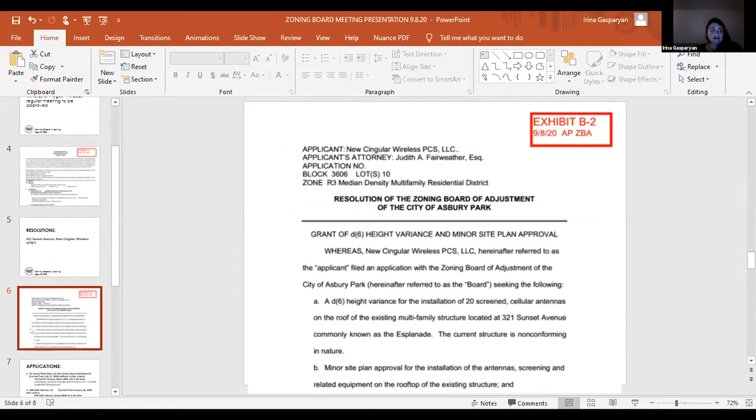Okay, all right, and I'm sorry, just a matter of record keeping. So we're going to strike that as Exhibit B2 for this evening. It's been tabled, that's all. It hasn't been entered, so you could just table it. Okay, all right, thank you.

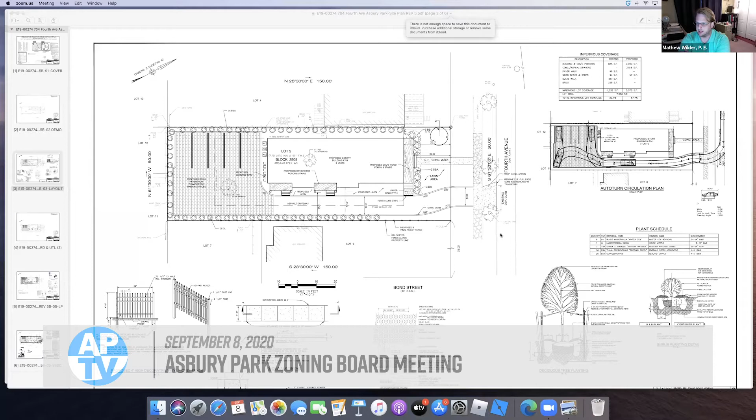Everybody see the site plan up right now? Yes. Yes. Okay, has that been marked? So this is the set of the site plans that were submitted ahead of this meeting. I'm not sure where we left off with exhibits. Irina, has that been marked? Yes, it has been pre-marked. Just one second. Okay, and that is marked Exhibit A6.

Thank you. So I think what I'll first do is a quick summary of the larger changes we made to the plan, and then I'll go through the inside engineering review from September 3rd and hit some of the finer points. So from a macro overview, the most significant change we made to the plan from a site perspective is we rotated the parking 90 degrees. There was some concern about the vehicles backing out towards the AC units, and realistically, when we shifted it, it just made a lot more sense from a layout perspective to have the parking going east to west versus north to south.

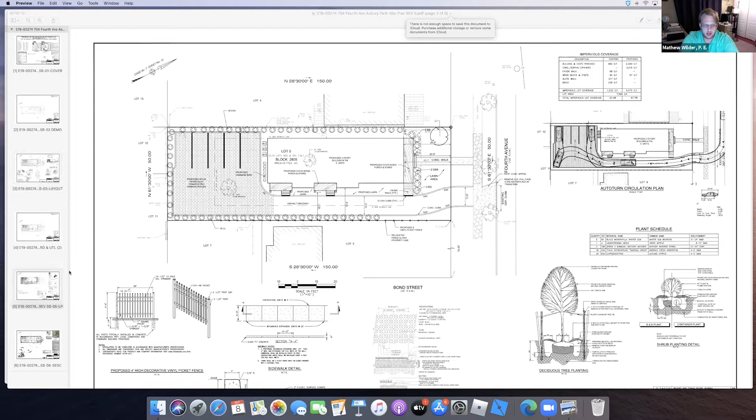The next sheet I'm going to flip to is my lighting. Whoops, what just happened? I'm not sure why, let me just try that one more time. I apologize, it decided to go crazy on me for a second. Let's try that again.

All right, so the lighting plan we did revise. We're going to make some additional modifications to it, but what we tried to demonstrate here is the impact the proposed fencing has on the lighting design. What we typically do is mask the areas off-site where our lighting has no effect, but at the request of the board engineer, we will add the illumination levels when they're zero off-site, just to demonstrate that we're not negatively impacting any adjacent property owners.

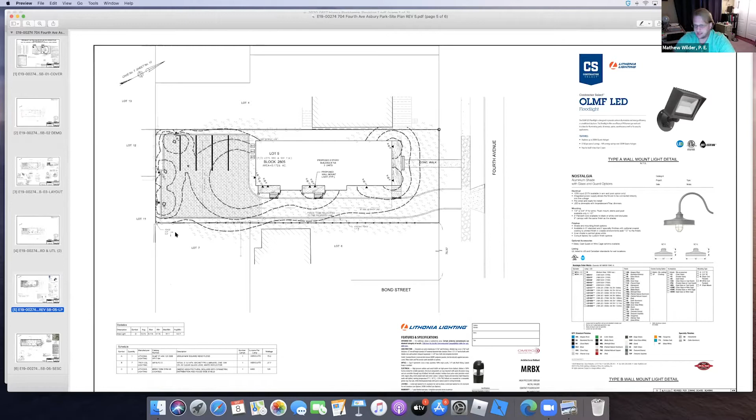And then the last thing I'd like to point out from a global perspective is the truck circulation, the vehicle circulation that we prepared for the property. Again, when we started revising that parking and rotating it 90 degrees, it actually ended up working out quite a bit better for getting vehicles into and out of the parking spaces. What we've indicated here are the two most restrictive turning movements. First is a turning movement entering the parking space nearest the building.

And that is the tightest due to the fact that you have this curve that you have to contend with to get into the parking spot. And then the vehicular movement that we modeled for vehicles leaving, we modeled the southernmost parking space as that has the most limited room to back up and then pull forward to leave the site.

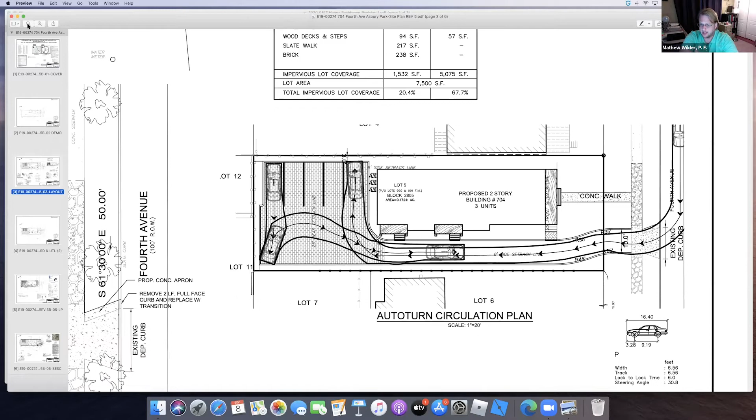So from a site perspective, Dan Conditor, the architect, will address some of the building related items reflected on my plan. But from a site engineering perspective, those are the significant changes we made relative to the revised plan. Before you get much further, I just want to go over a couple of things for the board's edification.

First, as it pertains to the driveway materials, can you describe what we have currently and how the space sizes were related to the building changing? Sure. When the building reduced in size slightly, it afforded us a bit more room for the parking area. If you recall, we were proposing 8-foot wide parking spaces by 19 feet long. Now we are proposing for the 4 southern parking spaces, 8.5 by 19, so fully conforming stalls. The northernmost stall, because it has the tightest turning radius, is actually a 10.5-foot wide by 19 space. So before we were requesting relief for parking space size, that relief is no longer being sought.

Relative to wheel stops, are they being planned? No. Right now there's full height curbs surrounding the entire parking area, which is usually enough to stop a vehicle. In this situation I wouldn't have concerns about adding wheel stops. I typically don't like them because of a tripping hazard, but realistically if we put them up against the curb line, I wouldn't be concerned with the tripping hazard. But we do have full height curb, which, for lack of a better term, the curb stop would essentially protect some of the landscaping, but the curb and landscaping sort of do that on their own.

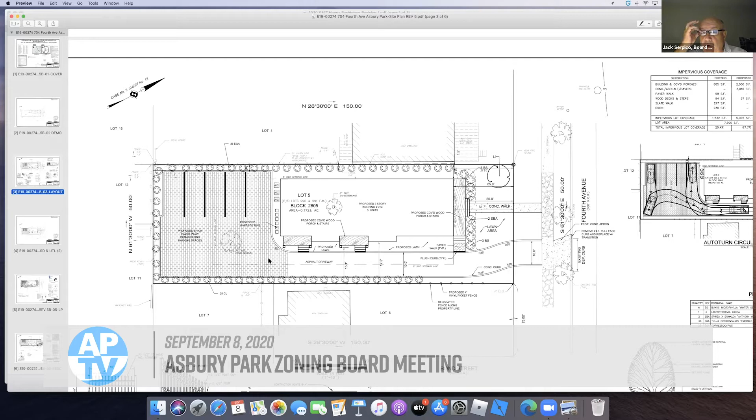Excuse me for interrupting. Which report are you referring to on the zoning review? I'm referring to comment number 17, the top of page 4. And what's the date? September 3rd, 2020. It's still the inside engineering letter, Jack. Oh, okay, okay, yes, I thought he was going to the planner's report. No, I'm going all the way through the insight letter. And just for the record, that revised insight engineering report has been marked into evidence as B3. Okay, I'm sorry for the interruption. What page were you referring to again? The top of page 4, zoning review, comment number 17.

Thank you. So the question was how we came to the 0.476 floor area ratio. Two things were done, and the architect will speak in more detail about this, but the main thing is we reduced the height of the basement. A basement with 7 feet of head height or greater is counted in the floor area ratio; less than 7 feet is not. So we reduced the height of the basement, and it is no longer considered in the floor area ratio. Besides that, the building was tweaked and massaged a little bit and I believe decreased slightly, but that is the reason we are now proposing the 0.476 floor area ratio.

Lastly, I'll quickly hit comment number 19. I realize my plan did not provide dimensions for rear yard setbacks. The required rear yard setback for this zone is 25 feet. 77 feet exists and 53 feet is proposed — fully conforming, but I thought it important to put it on the record.

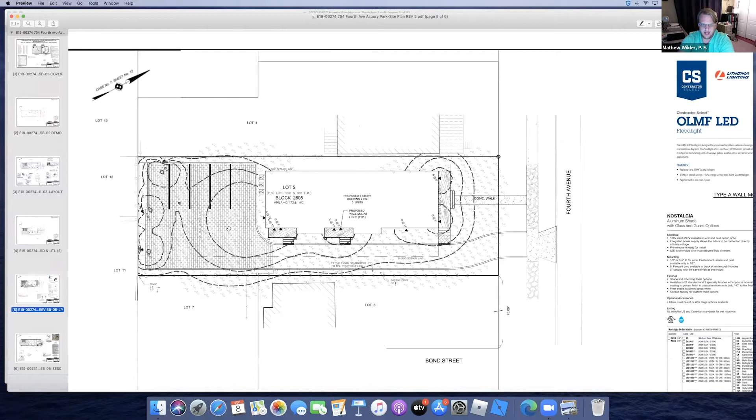Lastly, on 26D, regarding a floodlight in the rear of the building: as currently proposed, there is really almost no light spillage from our proposed development. The areas of light spillage you'll see are 0.2, 0.3, some very small areas of 0.4 at the property line, which is consistent with ambient moonlight. So the proposed lighting as designed has been made to be really selective in its impact.

And how would you come to those numbers, Mr. Wilder? Did you test that? So we have a program we use called Visual, and what it does is allow us to model a site as it relates to illumination levels. We input the type of light — the model, the make, the wattage — and the height of it, and it spits out these numbers and creates illumination contours. So I'll zoom in. So it's more theoretical than real.

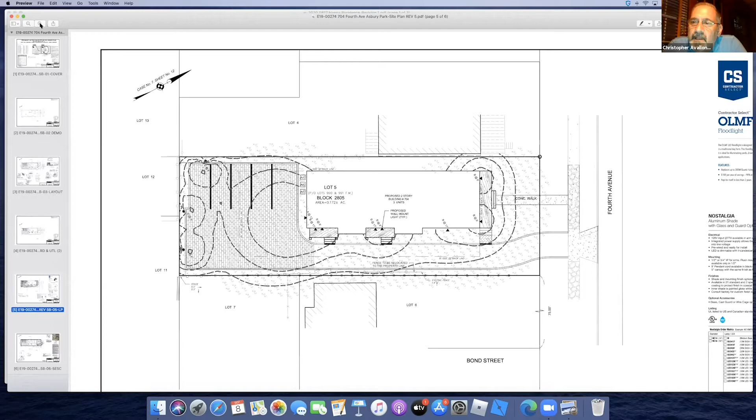Regarding the validity of the program, I can't really comment on that, but it is a widely accepted program to perform lighting analyses. And Doug, are you okay with that?

Well, I think the comment was more geared toward... I get the whole level of light on the ground, but being that it's more of a floodlight type of fixture, the comment was more about the source of the light and its ability to be bright at the source, not cut off from view, especially from second floor bedrooms and stuff like that.

Understood. Yeah, again, we have no issue replacing the light with a different style. We're trying to throw it down and throw it out, not really trying to throw it sideways, if you will. So we take no exception to swapping out the light to a more full cutoff type wall pack. That's no issue.

Okay, thank you, Mr. Wilder. How tall are the lights? So right now, the way it's modeled, if you're looking at the screen, we indicate the heights the lights are run at. So there's these B lights that are at 8 feet, and then there's some that are run at 17 feet.

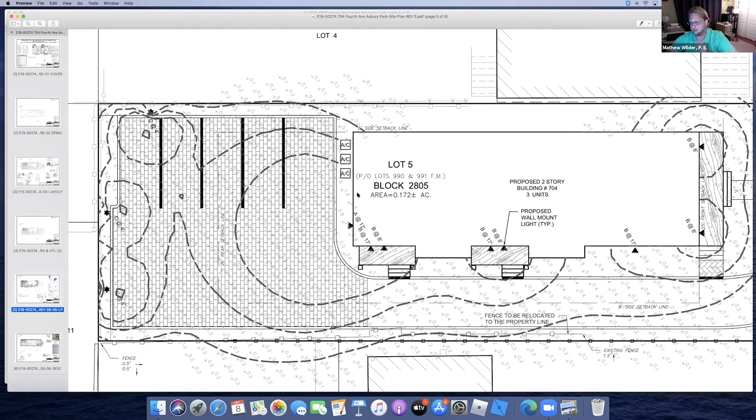So again, no issue tweaking the lights and revising them to be more consistent with what you guys are looking for. This is Donna Miller. The height is less of an issue if you're going to use a full cutoff fixture. So I know Doug and I will be very interested in seeing a revised photometric if you employ a different style fixture, and that may solve a lot of our concerns.

Okay, yeah, I still think, like I said, if we need to add some additional bollard lights because the full cutoff doesn't throw as far, that's not an issue. We can certainly do that. And I understand people who have those second floor units and have that little balcony space are going to want a light. So we just want it to be as low impact as possible on the adjoining residents. Understood, absolutely.

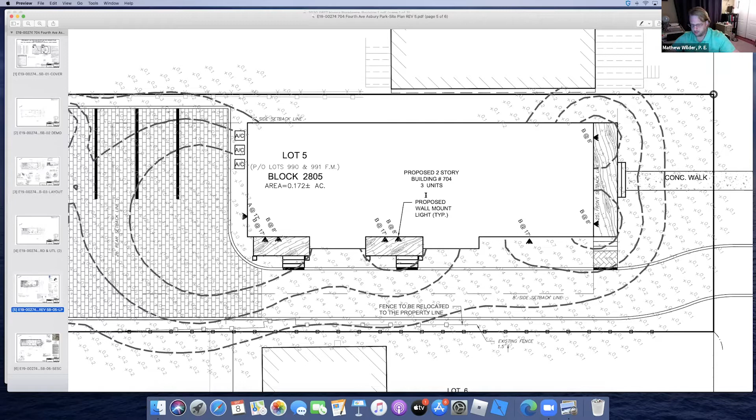So the next comment I'll go to is comment 27, which talks about stormwater. First, what is your objection, Mr. Wilder, of using more of a pervious type of paver?

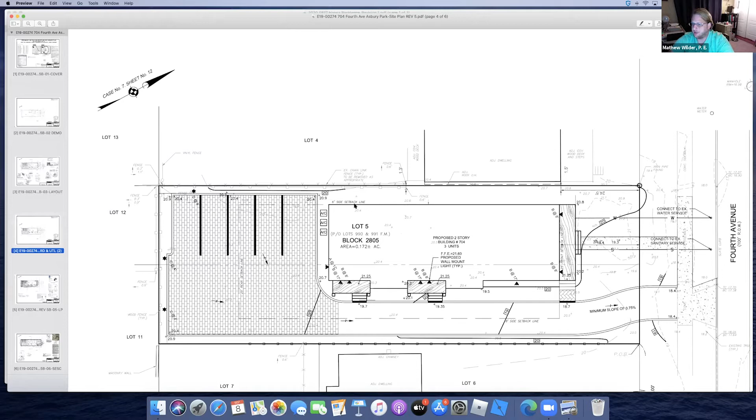Yes, I have concerns with pervious pavement and pervious pavers due to maintenance, typically snow removal. It's incredibly hard to maintain because you can't treat it how you typically would treat an asphalt surface. With a typical asphalt surface, you can put sand down, you can put salt down, and you're not worried about clogging the pores. With a porous material, the exact opposite is true. You have to ensure that you don't clog the pores because your porous asphalt or porous pavers are no longer porous. It's the same as putting down porous asphalt and then sealing it, it no longer operates how it's intended to.

So typically you'll have difficulty maintaining these areas in the winter months because it's meant to hold water, and because it's meant to hold water, I get concerned with icing and slip and fall hazards. There are locations where a porous material, a porous concrete sidewalk let's say, is appropriate. In my opinion, this site is not conducive to a porous paver or porous asphalt for that reason.

But relative to the stormwater, let me walk you guys through what we're going to propose. I know at the last meeting it was requested that we provide this on a revised plan. We wanted to get this board's feedback before we located, sized, and designed the dry well system, but I can certainly tell you what we intend to do.

So between the building and 4th Ave, we're going to install these ADS StormTech chambers. Essentially they're pipes that are cut in half, installed on a stone bed, so they allow water to infiltrate. They would be sized to basically fully detain what we call the 2-year storm, which in any given year has a 50% chance of occurring.

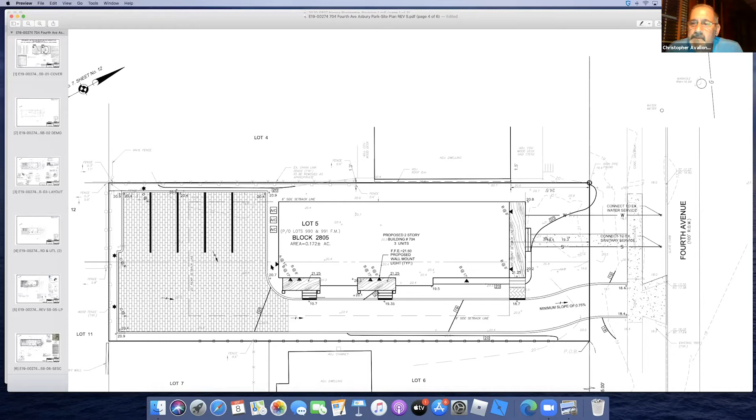Where do you plan to put your HVAC equipment and your refuse dumpsters, Mr. Wilder? We are proposing 3 AC units in the back of the building, on the south side. In the event we end up doing 2 zones for all of these units, most likely a second AC unit will be located in the attic of the individual units.

Relative to the refuse enclosure, we're proposing 1 bin for garbage and 1 bin for recycling. You'll notice we're showing 6 bins in the rear of our property - 3 of those will be earmarked for garbage, and 3 will be earmarked for recycling.

And will the trucks come into the property to empty those refuse bins, or how will that work?

I'm not certain, but my hunch is that due to the significant shoulder on 4th Avenue, the private hauler will probably pick it up at the street. We would need to confirm with the selected hauler that is the case. Obviously, there are certain requirements we need to meet from both the city's perspective and for the private hauler. So considering the right-of-way width of 4th Ave and the width of the area available to us, I'm assuming that...

I don't see how a truck would turn around if there's cars in there. How would that work? That's why I believe they'll be picked up at the street. The parking lot has not been designed for a refuse vehicle to make a K-turn. So if the vehicle had to come onto the property, they'd be backing out, which is not ideal. So again, I believe they'll be picking up the trash and recyclables from 4th Avenue, from bins on the road.

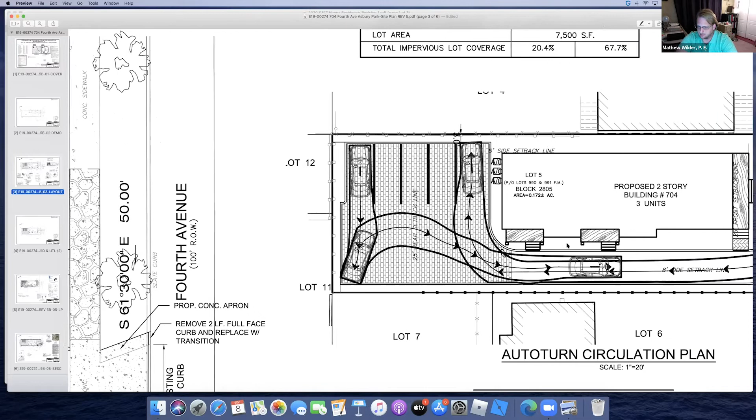In your opinion, Doug, do you think this is a safe layout? Yeah, it certainly is tight, but I think it works. If Mr. Wilder can clean up the plan - there's a couple spots where it touches over a little bit near the landscape buffer - I think we'd be okay with it.

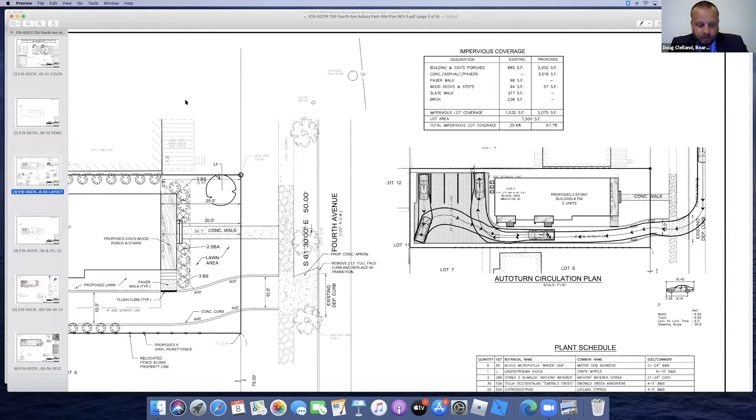We had another comment about placing a couple protected bollards near the mechanical equipment, just as that car in the northernmost spot's backing out - it could get kind of tight - just to help protect that equipment and avoid any potential damage. We take no issue with adding a couple bollards to protect those units.

What about the fencing, Mr. Wilder? What's being used as fencing? So right now there's an existing wood fence on the property, and it's actually in pretty good condition. The intent is to take that existing wood fence and relocate it to the property line, where it's not currently located, with a slight exception - the existing fence stops relatively close to where the front setback is, so we're going to propose a picket fence from that point to the front. There's an existing solid fence that wraps around the entire property that's in good condition, and we're looking to maintain that.

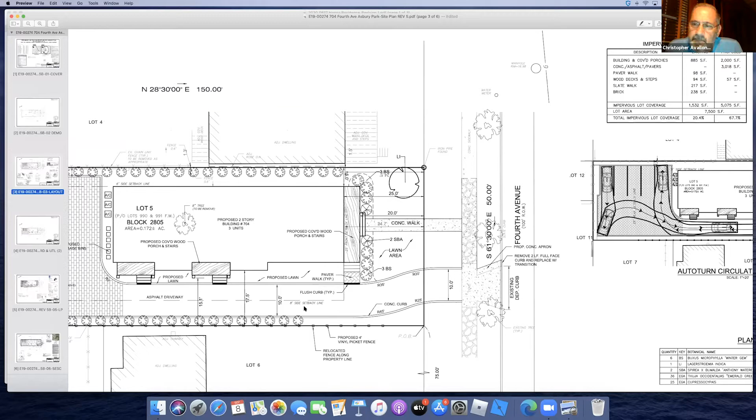From what I understand, there will be fences that are going to be removed - is that correct? It's not really being removed, it's just being relocated to the property line. The existing fence is in pretty good condition, so the intent is to use that existing fence around the property. And it's a wood fence, correct? That's correct. You're not planning to use any vinyl fencing? No, we're not - I noticed my plan as I'm speaking says vinyl picket, but obviously if we're going to match the existing fence in type and appearance, that would also be a wood picket fence from that point towards the front of the property.

Do any of the other board members have any other questions? Yeah, one last question. In the engineering report, it mentions that you didn't landscape 10% of the area, which requires a variance. Is there any additional planting you could put in so the variance isn't needed? My understanding of that requirement is it's interior lot landscaping. To do that, we would have to carve out almost like a finger island in the parking field to allow for some plantings. It's not perimeter landscaping, it's specific to interior lot landscaping, so the only way to really do that would be to eliminate a parking space. For that reason, we're seeking that variance.

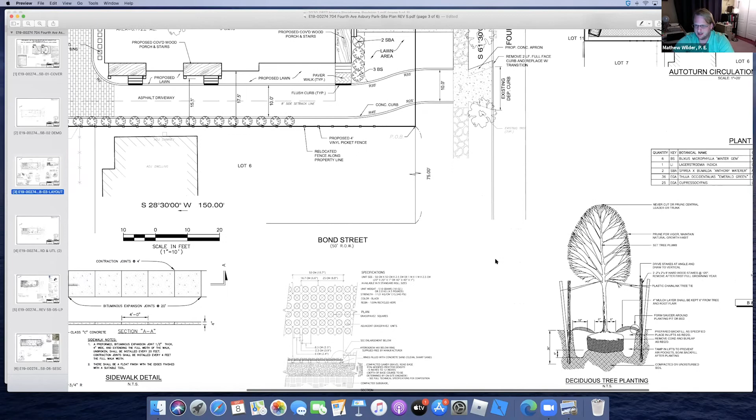Okay, and then street trees, are those proposed? We're proposing one street tree in the northwestern corner. We could certainly propose an additional tree on the east side of the concrete sidewalk, in between the sidewalk and the driveway. This is Donna Miller - that's not a street tree. Well, it should be, by the curb line in the right of way - you're proposing front yard landscaping. Right, so we have existing street trees between the existing sidewalk and 4th Ave. We're not looking to integrate any new plantings in that area, if that's your question.

We're looking to maintain those existing plantings. Okay, this is Donna again. So in our report, we point out that one of the trees is in poor condition, has a great big hole in the bottom of the trunk, and there's a section of the ordinance that requires you either make a contribution or put in trees for every application. So you're going to have to do one or both. Yeah, actually I think we testified to this last time, just to refresh the record - we had already indicated that we would replace that tree.

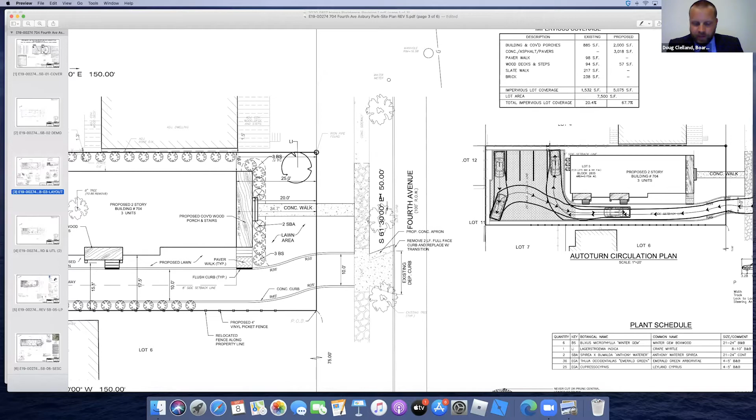I have a quick point of clarification on the stormwater management. So it was mentioned there would be both overflows at the downspout locations and a pop-up emitter, or the inspection port essentially acting as one. Is it possible, in the event of a larger, lower frequency rain event, to add some additional protection to the lot to the west? Is it possible to add a small berm along with the landscaping and some additional grading to show that the extra runoff will wind up in 4th Avenue?

Sure, I don't think that would be an issue. We could even, as an extra measure of safety, eliminate the Y fitting at the building and just utilize on that side of the site the pop-up drain connected to the underground facility. We need to have the inspection port anyway to monitor the system and make sure it's functioning properly, so typically, since we have them anyway, I like to use them as a pop-up overflow where appropriate. I think we can look at tweaking the grades and eliminate the Y fitting for that downspout, so the only real discharge from the system would be from the pop-up on that side, and the eastern side would have both the Y fitting and the pop-up. I don't think that's an issue.

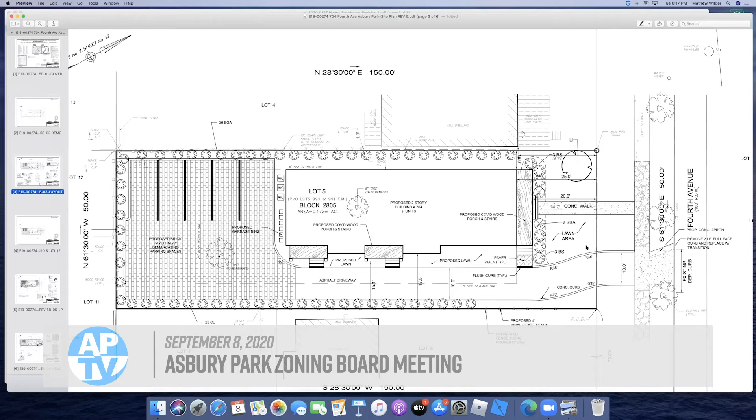You've got a lighting plan that shows light spillage, and I noticed that some of the spillage goes across the property line on the north - and I'm sorry, my name is Edward Baumgartner, I'm at 706 4th Avenue, that's my property over there. Somehow the dotted line magically cuts off. Does that extend onto my front porch?

Right, so right now at the property line that abuts your property, we're showing an illumination level of 0.4 foot candles. 0.4 foot candles, as I indicated previously, is consistent with ambient moonlight. So the light nearest your property is only an 8-foot tall light. So you should not experience any light trespass or light spillage that would have any impact on you enjoying your front porch.

But there will be light spillage on my front porch, and I'm assuming the lights are on at what hours? So it would be typical of a residential home. More often than not, folks either put motion sensors on their lights, or they leave them on, turn them off, and go to bed. I would not expect these lights to be on overnight. But again, the light levels we're talking about at the property line are consistent with moonlight, so we're talking about a very low intensity light coming over the property line. So while we are showing some minor spillage onto the property, again, it's well within the tolerance of reason.

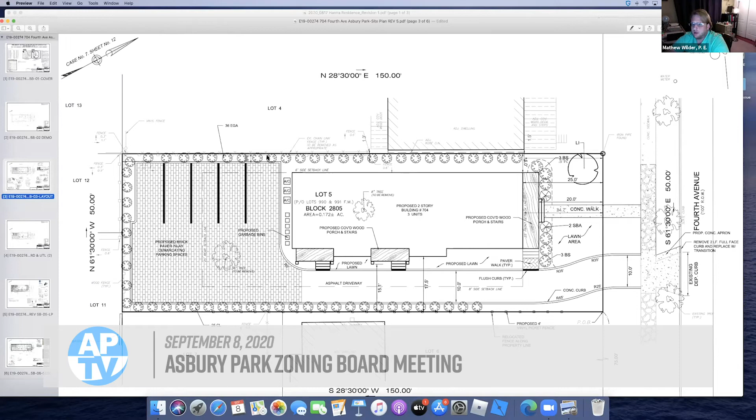Right. So in this type of situation, the trees really grow based on how they are maintained and managed. If they're allowed to grow in excessive width or a large diameter, some of these trees can grow to fairly large diameters. In this situation, because of the space that we're limited to on both the west and the east side, and even the south for that matter, these would be continually maintained to be more of a columnar, narrow tree.

And just to interject, Mr. Wilder, the two species that we're talking about, they're different on either sideline of the property, correct? That's correct. As it pertains to Lot 4, which I'm assuming is Mr. Baumgartner's property, that was previously about the property itself being approximately 17 inches from his house, that it's now been moved back for an increased setback to a little bit over around 6 feet.

In that planting, we're talking about the smaller of the two, which is the emerald green arborvitae, correct? That's correct. Thank you. So my question is, what diameter do these grow out to, and to what height?

Again, it's a function of the maintenance of the property, of the tree itself. I mean, realistically, I think a 2-foot diameter tree could be maintained, and again, the height is going to be a function of the width that's maintained of the tree. So these will have continual maintenance because of the fact that it is in a relatively tight area. So realistically, I would think you'd be looking at a 2 to 3 foot diameter tree in totality. And the height would be a function of what would be stable. I don't envision anything really greater than maybe 10 to 12 feet in height. But I'm not certain as to what the height would be when you consider the width.

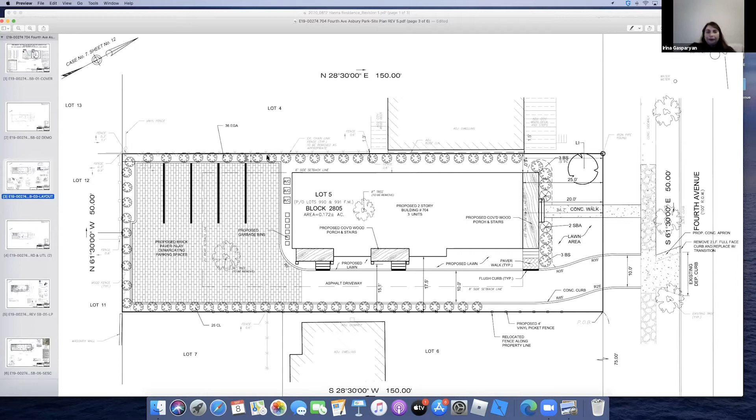I push unmute - hello? But Warner, we can barely hear you, can you speak up please? Hello, testing, 1, 2. Yes, that's better. Thank you. Okay, hello everyone, how are you? Hello, Mr. Baumgarten, how are you? I'm Gardner.

Baumgartner - differentiate me from the prior speaker. Just a procedural question right off the top: are we going to hear from someone to talk about the architecture or style of the building? Yes, we are. Okay, good.

When we were at the prior hearing, this board had talked about the additional need for buffering, and the real way to achieve additional buffering would be additional landscaping. Okay, so it's intended to provide some sort of screening, privacy, buffering between the two properties, correct? That's correct. In doing so, did you consider the adjacent property owner who just testified, how he's going to maintain his building? How does one get access to maintain that building facade in an 18-inch space?

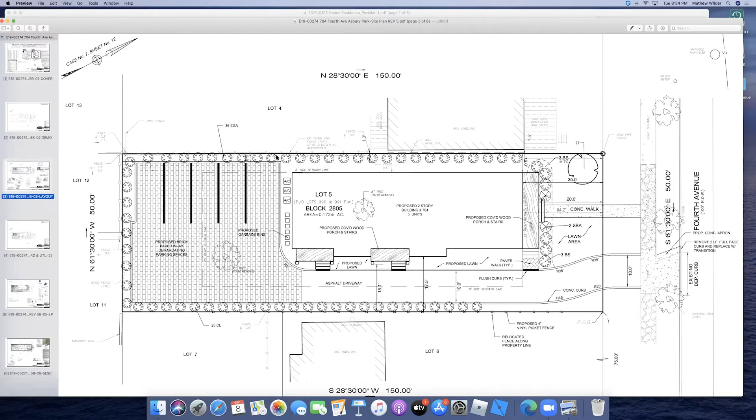Thank you, Mr. Suntory. Please proceed, Mr. Baumgartner. Okay, I heard the comment earlier about a damaged street tree - could you identify which street tree that is? Is that to the south of the curb cut or to the north of the curb cut? I am not certain - when I visited the property, I did not take inventory of the existing trees, so I'm not certain which tree it is.

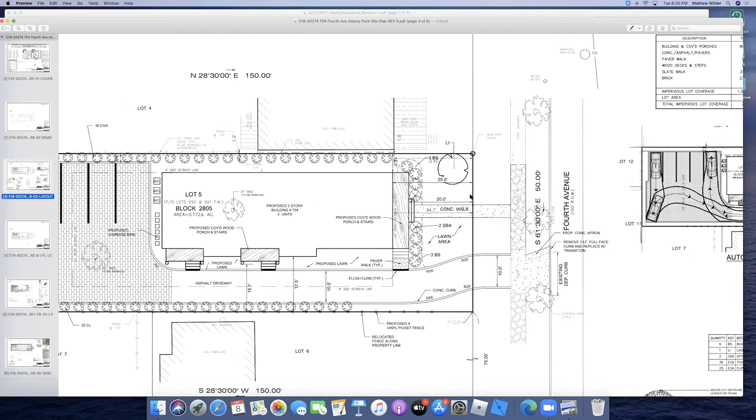This is Donna - Warner, it's the easterly street tree. So, okay, oh easterly - yeah, I'm looking at the diagram backward, sideways. Okay, the east of the curb cut. East of the driveway, correct. Okay.

Now back to my question: would the applicant be amenable to removing that damaged tree and taking the additional required apron space instead from the east side rather than the west side? There seems to be an awkward curve in that driveway - there's like a little S bend in the driveway. Would you accept that having the driveway come straight out to the street would be advisable?

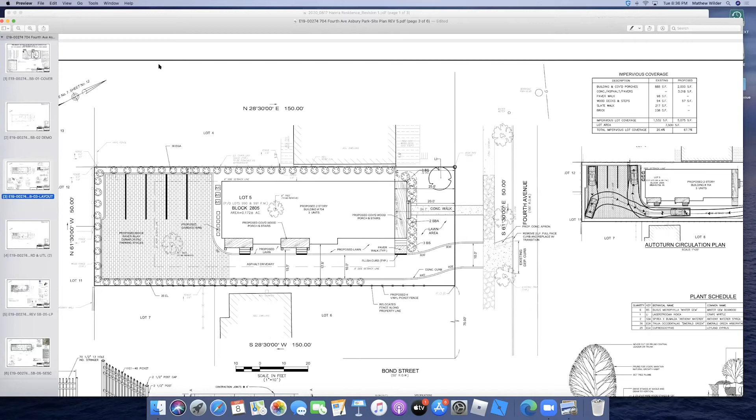Well, we still have a little bit of a jog, just because you want to make sure the driveway is away from the common property line, to make sure you don't have any encroachment with the concrete apron across a projection of the side property line. As Ms. Mullins pointed out, we need to replace the tree, which my guess is we will replace in kind, so there would still be a tree in that same general vicinity of where the existing tree is now, just replaced with a healthy tree.

But from a usability standpoint, the jog in the driveway doesn't really impact the access, ingress, or egress. But if the board wanted us to straighten it out slightly more, that would be fine with us. Thank you, that would probably be advisable.

The parking in the rear, the discussion about the turning movements is of interest to me. Was any analysis done by limiting the parking to back-in parking? Does that alleviate the situation back there by mandating that people can only back into the spaces? We did not do an analysis of that, and essentially that would be an unenforceable restriction. Residents are going to do what's easier. If they can access their spots pulling in head first, they're going to pull in head first. We could perform that truck turning movement analysis, but I think the parking lot as laid out functionally works, and any restriction requiring residents to back in wouldn't be enforceable.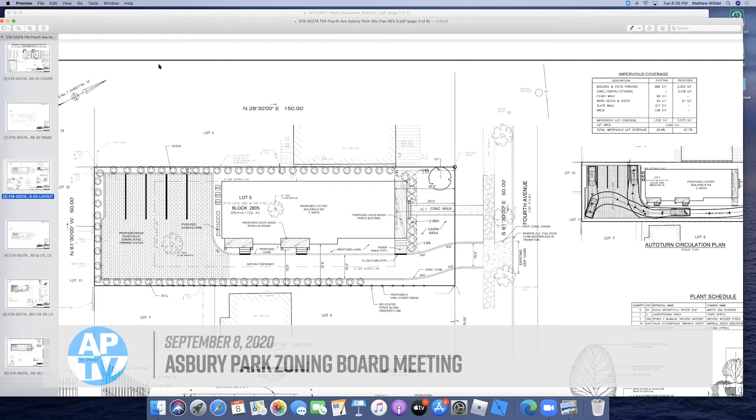He can't answer that question, he's an engineer. Ask him engineering details, that's title issues. Okay, thank you, thank you Jack.

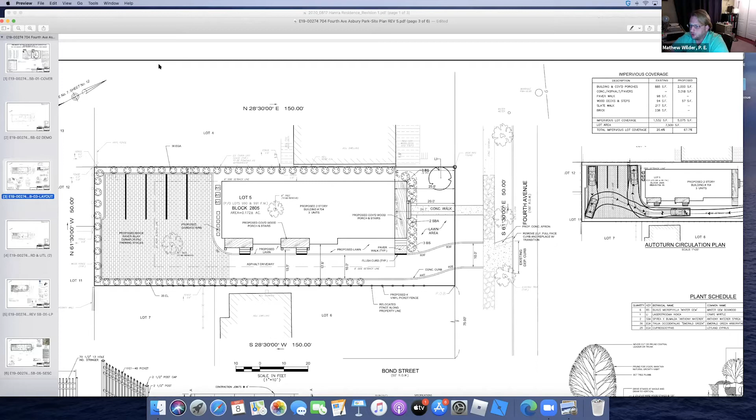Did you consider reducing the overall bulk, the size of the building, to create a larger parking area? So the building you're looking at is actually slightly smaller than the last iteration, and that was done to give us more room for the parking area. The 4 southern parking spaces are 8.5 feet wide, and because of the reduction in building size, we were able to take the northernmost parking space and make it 10.5 foot wide, to ensure we have adequate room for maneuverability from the site.

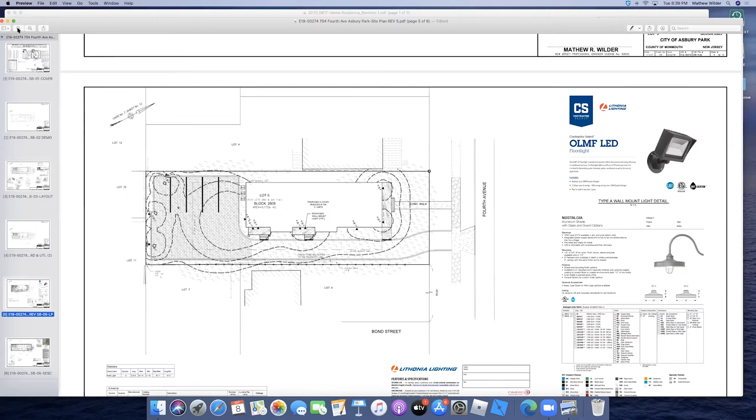Okay. Regarding the lighting, I saw graphics of the actual light fixtures on your lighting sheet there. Sure, would you bring those up? Over there to the right. Yeah, you've got A, B, and C. The A, I think you testified, would be at the rear of the property facing the parking lot, correct?

Right, so A is a light on the rear of the building, the southern side facing the parking lot. The B lights are on the eastern and northern side of the proposed building, varying between 8 foot and 16 feet in height. And the C lights are bollard lights proposed around the parking, low level lights to provide a little additional illumination around the parking area.

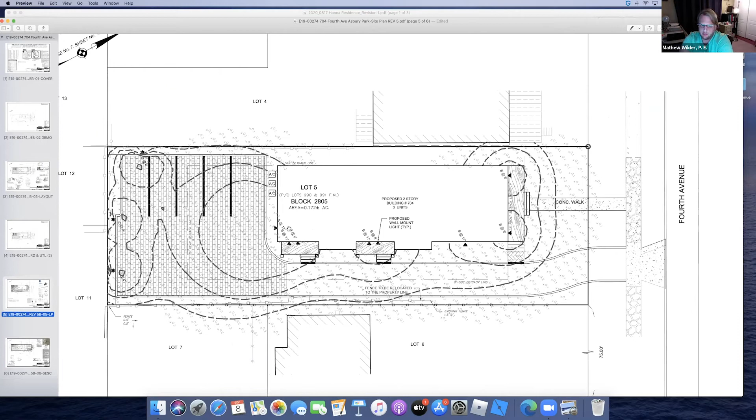Okay, so just to reiterate some earlier questions and testimony, your photometric here, your lighting diagram, is essentially lighting at grade, on the ground, correct? That's correct. Are you aware that the biggest problem with lighting is glare from direct view of the light source?

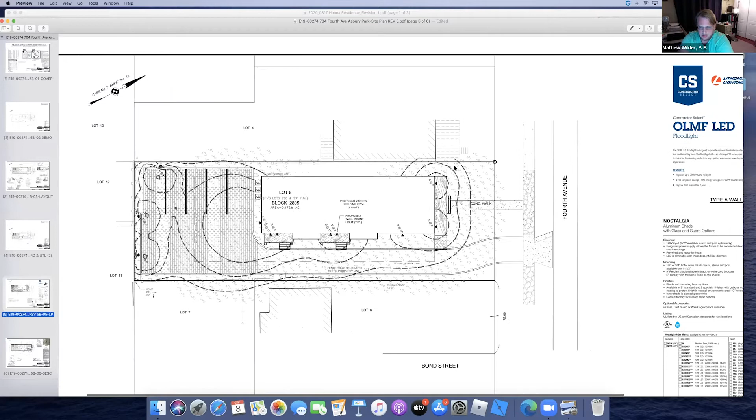Sure, and I guess the question was regarding light A, which is sort of a floodlight wall pack, which we will eliminate to prevent any glare from the light source itself. It'll be a more full cutoff style fixture that instead of throwing it out, throws it down and out. It will likely require us to add some additional bollard lights to ensure adequate illumination, but yes, we will be revising the lighting to address that.

With regard to fixture B, the same commitment? Yeah, fixture B is a more cutoff style fixture, it has guard options, but we can propose something more significantly a cutoff style fixture than what we're currently proposing. It's not an issue. Okay, full cutoff, fully shielded, such that the light source is not visible at all. Well, you're going to have a light that is 17 feet or 16 feet off the ground.

So there is the ability that if you look directly at the light, you will see it, but there is an angle at which the light throws. But again, it will be a full cutoff style fixture.

The ones you just referred to, about 16 or 17 feet off the ground, they're actually in the second floor porches, the second floor decks, correct? Correct. One is on the 8-foot light on the first level porch. The 17-foot, or what will be 16 feet, light is on the second level deck.

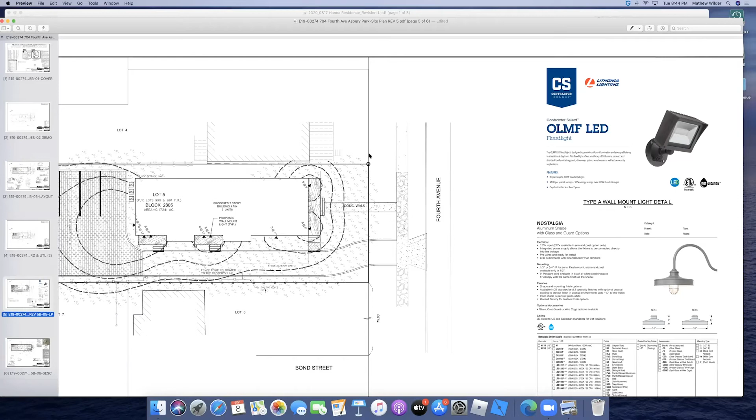Yes, I have Peter Connolly. Peter, go ahead and speak. Thank you, can you hear me? Yes. Sorry, Mr. Connolly, you're coming in a little broken up, can you try again? Mr. Connolly, 710 4th Avenue, can you hear me okay? No, is everyone else having the same trouble? Sounds like he's on a speaker. Yeah, yeah, let me see if I can switch. How about now, can you hear me now? Yes, that's much better, thank you. Excellent, no thank you. Again, Peter Connolly, 710 4th Avenue.

So just a clarification question. You've talked a lot about the runoff from the structure, but I don't know if I missed where you spoke about the runoff from the parking lot itself. Sure, so the parking lot and the driveway is fully surrounded by full height curb, so it's curbed at 6 inches elevated above the driveway. That will act as a barrier. So the driveway and parking area will slope towards 4th Avenue, and all the runoff from that area will go into 4th Avenue, where it will flow along the curb until it gets captured by off-site inlets in the roadway. Helpful, thank you.

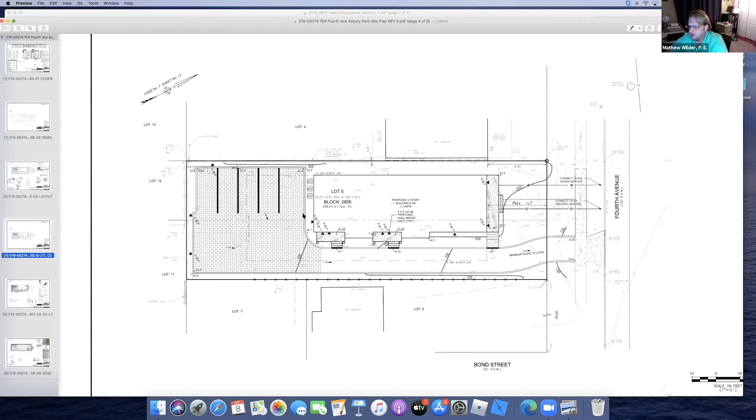And then, well, I myself do not have a driveway, so I would love to have a lighted parking lot. Was there any consideration to reduce the number of spaces since it's a 3-family house? I just don't quite get the logic behind 5 spaces for a 3-family unit. So that is what the ordinance requires for a multifamily unit of two or more units, or two or more bedrooms. Each unit requires 1.5 parking spaces, so we're required to have 4.5, and we're proposing 5 to be consistent with the ordinance. I love that it requires 4.5, that's like a mini car, like a smart car.

All right, and then my final question, this is again just a clarification. That full moon lighting spread, is that full moon? Is that half moon? Is that harvest moon? No, I don't know what you mean when you say a moon. You know, right, so average moon. An average. So on any given night, a full moon would create a greater illumination, but on an average night, a half moon or so, when you go outside, that sort of ambient lighting that it's creating is what we're proposing at the individual property lines.

What I will state is, I've certainly heard from yourself and the other neighbors in this area, we're going to end up, by the revised lighting analysis that we're going to do, the light levels at the property line are going to be decreased further to where if they're not 0, they're 0.1 or 0.2, which is de minimis. You wouldn't even realize there's any spillage from those lights at the property line. Okay, thanks, that's all I have.

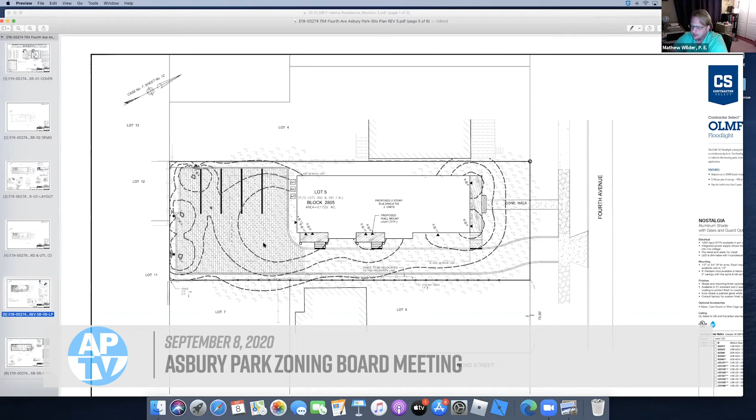So NOAA, the oceanic agency, issued an update for New Jersey rainfall data. Analysis is done on a county by county basis, so they have a 2-year storm, a 10-year storm, a 100-year storm intensity based on whether you're in Bergen County, Ocean County, Monmouth County. When I talk about the 10-year storm event, on average this storm would occur once every 10 years based on the intensity, but that information is on a county by county basis, not town by town.

Okay. And Monmouth County is a pretty large county, and I think being close to the ocean may impact our water runoff a bit differently. So I don't know, do you feel that study is appropriate?

Realistically, it's not so much dependent on the area of the state you're in. If you're in a flood zone, obviously that's one thing, but given where Asbury Park is located, what you'd expect to see due to its location would be limitations associated with the soils. So groundwater might be high, permeability might be low, and the design itself would take that into consideration.

Relative to the design storm, for a typical single family home, what we typically see is that they want it designed for the 2-year or a 2-inch rainfall event. Every municipality is a little different. Just for this board's edification, a 10-year storm is slightly less than 6 inches per hour of rain, or 6 inches of rain in a 24-hour period, so it's a significant amount of runoff and rainfall.

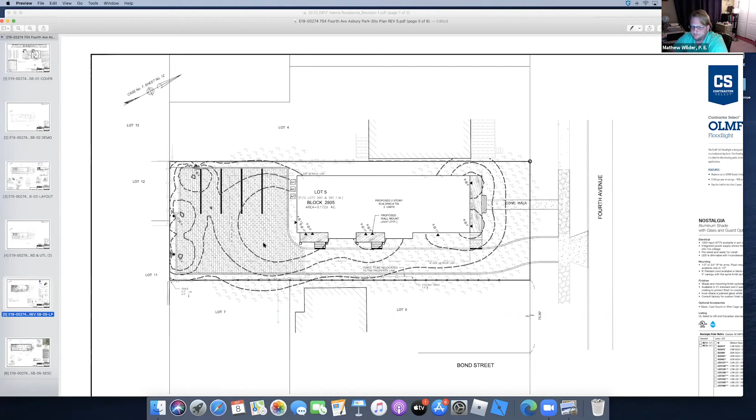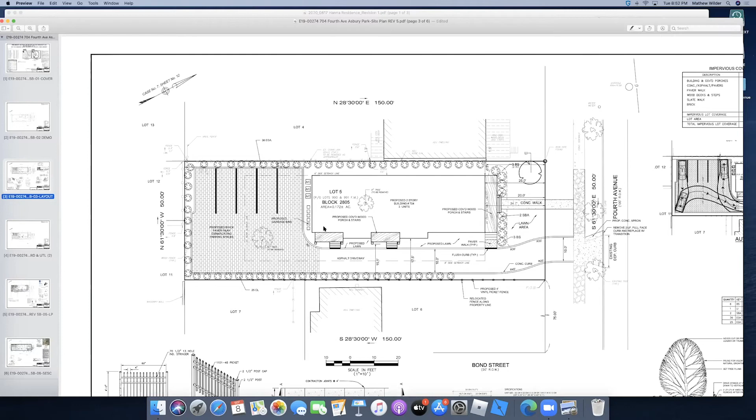Right, it's compliant with the ordinance for sure, but what I've seen you do here is craftily construct a very dense property development. You have 9 bathrooms and 9 bedrooms, and potentially 18 or more people living on this property. So I was wondering whether you felt these 5 parking spaces were appropriate for that number of people, whether 5 is sufficient for their needs.

We're sort of beholden to the ordinance, based on the master plan and the way ordinances are adopted. Those who address the zoning ordinance for the city take into account demand for individual areas. So we're married to what the ordinance requires, because that's where our design is trying to be in compliance with the ordinance in its entirety. If you're asking could additional cars be on site, anything is possible, but we're designing it in accordance with the ordinance as it currently exists.

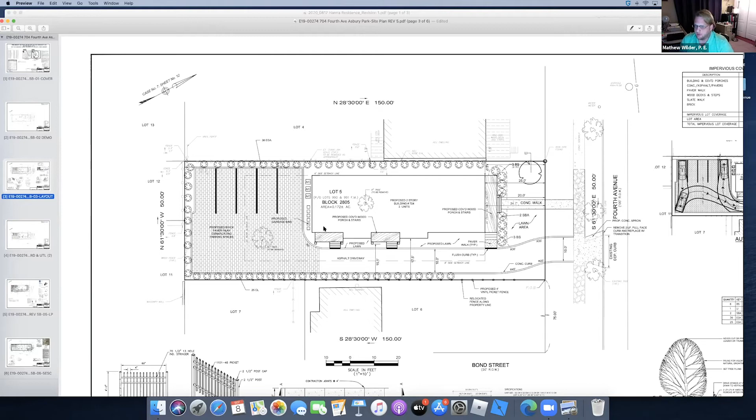Do you anticipate any impact upon the availability of street parking for the people who might be living on this property? As I intimated previously, you're noticing a trend towards smaller vehicles and even less demand for vehicular traffic. You're seeing a lot of folks bicycle and walk. Based on that, and the fact that the ordinance requires 1.5 spaces per unit, I believe what we're proposing is appropriate from an off-street parking standpoint.

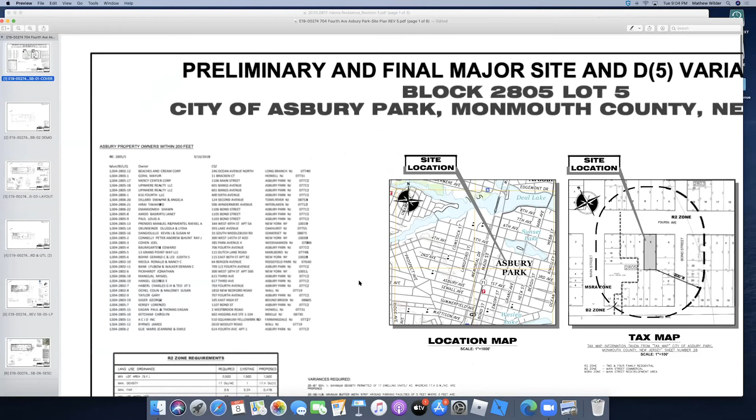But again, my testimony, well, can I ask the engineer, from 3,000 to what footprint? Or are you going to defer that to another expert? The engineer doesn't know what the new footprint is. Consider the building, when you consider all the covered porches, the proposed coverage of the building will be slightly over 1,900 square feet in footprint, and that is each floor, obviously.

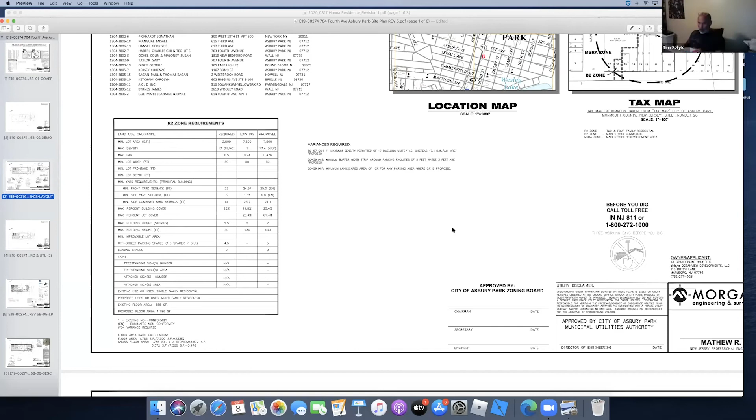No sir, all I'm asking is the footprint, sir. Of all three attached structures, you went from a one-family big unit of 3,000 square foot footprint. Now whatever you're doing is okay, I guess everybody wants to approve it. But all I'm asking is, relative to the next question which will be stormwater management, what's the footprint going to be now? You don't have that exact number?

Slightly over 1,900 square feet. Per unit? Per floor. So the building coverage on the property.

So are you saying that you're putting up 3 units that are going to take up less of a footprint than what's already there? I don't think you mean... My hunch is I'm not sure which plan you're referring to that shows 5 bedrooms. Again, that's not a plan I have.

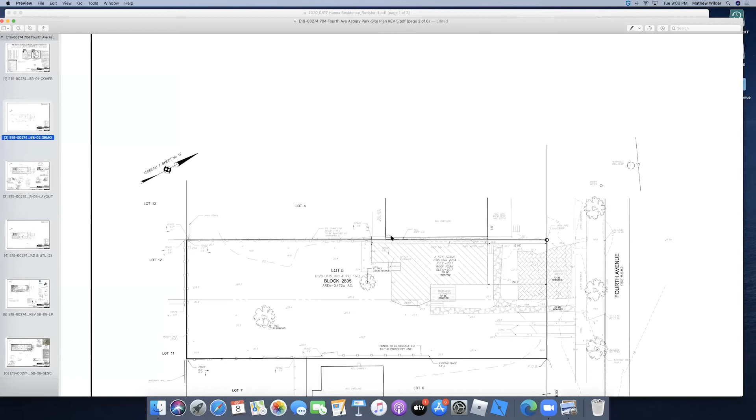Okay, if I may. Let me say this: the 3 structures are going to be attached, they're going to have a foundation and a basement. Can you tell me the length and width of that total? I don't want to know the floors going up or how many, just the footprint, which means on the ground. I don't have the exact dimensions.

Just for the... you don't have the exact. What kind of meeting is this? You don't have the exact. Mr. McNolly, I'm just going to mute you for 1 second, someone is trying to get a word in.

Yes, Mr. Wilder, you've obviously just testified to the fact, and I think what Mr. McNolly is confused about perhaps is total square footage versus footprint. He's asking footprint but giving total square footage. So the bottom line is, you testified in response to his question it was a little over 1,900 square feet. Is that correct? That's correct. There's nothing more to talk about because there's nothing more to analyze, because that's the number, correct? Correct. Thank you.

Okay, Mr. McNolly, do you have another question for Mr. Wilder's testimony? Okay, so then according to the 2 experts now, they're telling me that you're going from a 3,000 square foot footprint to 1,900. I'm okay with that. So you're building a smaller footprint.

First of all, for the record, that wasn't testified to. No one testified to the existing footprint. Mr. Wilder has testified to what the proposed footprint was in response to your question. So there is nothing on the record other than whatever you may be reading from, which may be a total square footage of the property as it pertains to 2 floors. Sustained, Mr. Santori.

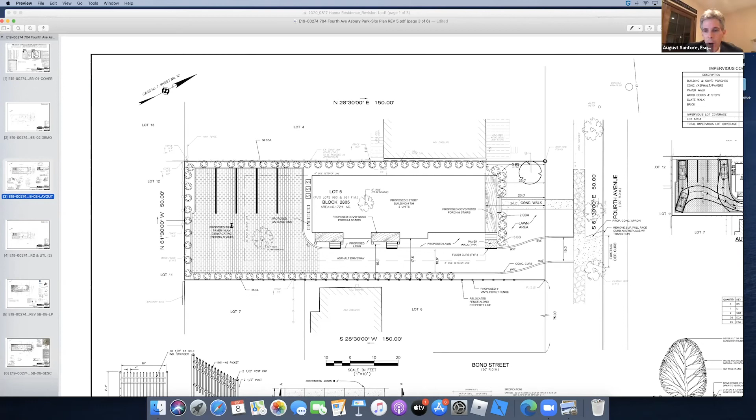Testifying, get to the questions. Okay, the question is, you're going to be paving that, correct? Correct. Yeah, I'm sorry? That's correct. No, that's not correct, Mr. Wilder, the backyard he's talking about. He asked you about the backyard and the parking area. You testified that it's going to be... the parking area will be pavers.

Right, pavers, correct. Okay, are you saying that they're going to be permeable to the water? They will not be, as the DEP defines them, as porous pavers or permeable pavers.

Okay, so here's my technical question: we see that it's a dirt lot, when it rains it gets sucked into that ground. You're going to put a less than permeable surface, pavers, call them whatever you want. Did you come up with a percentage of how much of that large area, that parking lot, which could have substantial downpours, is now taken away with semi-permeable? Is that what you're proposing, meaning a certain percentage of the water is going to go through the pavers, or it's not? For all intents and purposes, I am treating the pavers the same way as I would treat asphalt.

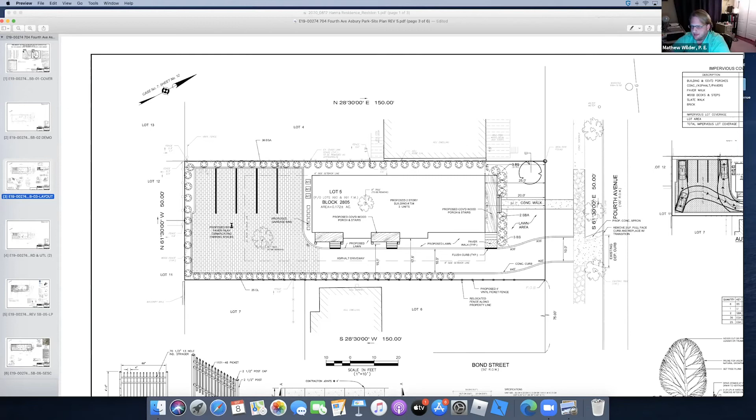Okay, so the 5 parking spots, or is it 6? 5? 5.

In the back are going to have a built-up curb around it to prevent the water from going to the neighbors. It's going to go from completely permeable dirt and grass to non-permeable, impermeable pavers for the parking lot, correct?

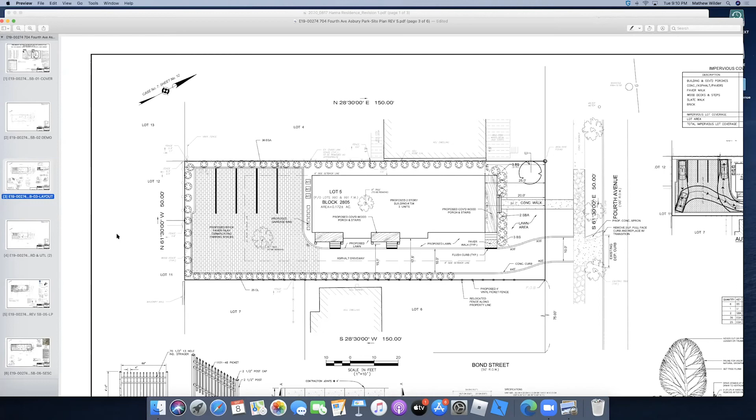That's correct. Are you saying now that you're going to pitch that towards Fourth? Because I'm looking right at it right now - it's pitched towards the neighbors. Are you going to site develop so that it pitches to Fourth? Because otherwise, how's the water going to get out of that lot?

Ernest, did you hear his testimony, all of it? Yeah, I did. I've been patiently listening. Okay, so he talked about a built-up curb around the perimeter, non-permeable surface, 5 parking spaces, which all sounds great. All I'm asking is, where's that water going, and what's going to bring it there? Didn't you hear him testify? Didn't you listen? I did hear, and he addressed that 2 or 3 times.

Okay, except for one thing. No, ask your question. I don't want to discuss it. Ask your question. Were you ever at the property during flooding?

I've not visited the property during a flooding event. Oh, great, so that really qualifies you. What is this lot in square feet? 7,500? Very good. 3,500 square feet of permeable to become impermeable, and you're not worried about where that water's going. Why don't you just put drains in there and attach it to the city sewer?

Mr. McNolly, please ask a question. That is a question. That's not a question. Can you put drains in that back lot and run a pipe to the city sewer, which would take care of the whole problem? Can you, or would you, or can you? I don't know how to ask it as a question.